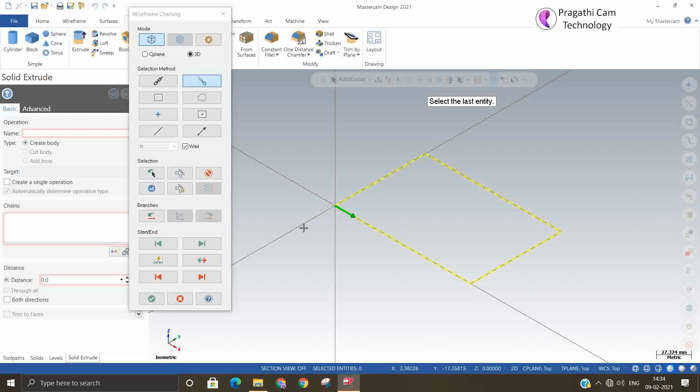I'll make one small solid model. I'll make one rectangle, 150 by 100. Okay, I'll say solid extrude. So make it. Okay.

So we'll add some holes here now. Go to solid holes. Nothing is there to pick from the points, so first I'll make some points so that I can place the holes in the right place. Okay, so I made some points.

Now solid holes, I'll pick that point. One, two, three. So all three are simple holes. You can change the type of hole and other things.

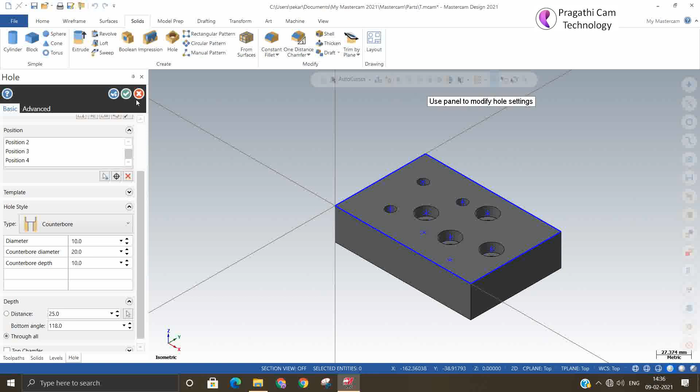Even if you want a stepped hole, meaning an Allen bolt hole, or a countersink type hole, or other type hole, whatever thing you want you can make it. These three holes will make a counterbore type hole. So these many holes are made now.

Now wireframe geometry is not required, so I just deleted it. Suppose you want to drill here, you need the center point and axis. For that application only, that hole axis option is necessary. But in 3 axis, this hole axis method is not much useful here. But still, I'll show you what the hole axis can do.

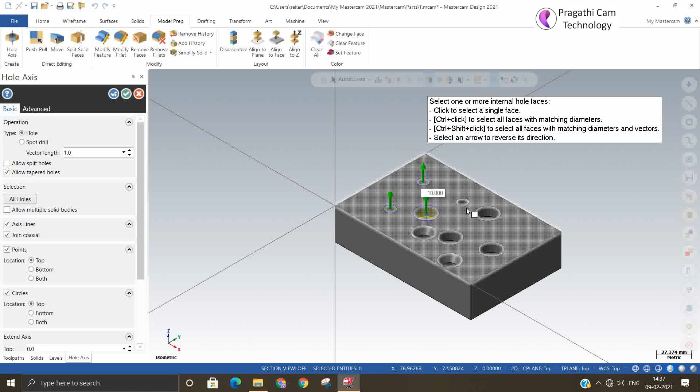Now I select the first hole, second hole, third hole, fourth hole, fifth hole. So two things you are getting together: one is the center point, and another is the tool axis. Together you are getting both. So while drilling, you will get the tool axis point and also the axis, both you will get it. So it makes it too easy to make the drilling.

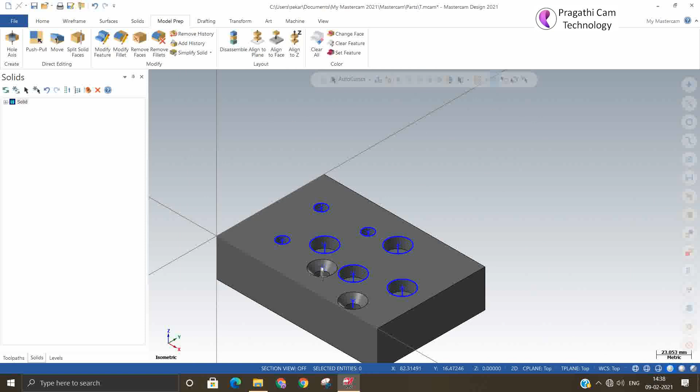Actually, this particular feature is not meant for this. Maybe a hole in the inclined plane you cannot otherwise do - in that situation it is useful.

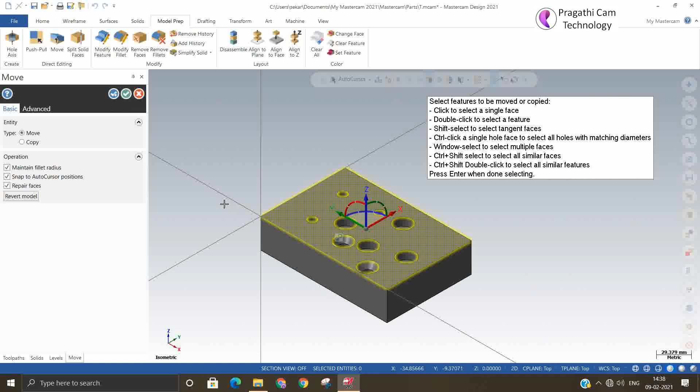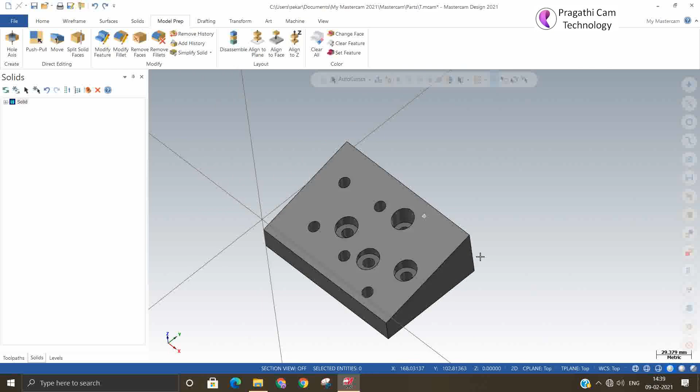So next option we will take the move option. I made it an inclined plane, but this, my hole, is still okay. I just made an inclined plane now. So now you need to drill the holes on that. So now definitely you need a hole axis, otherwise it's very difficult for you to catch the center point. So in that situation you can select the hole axis.

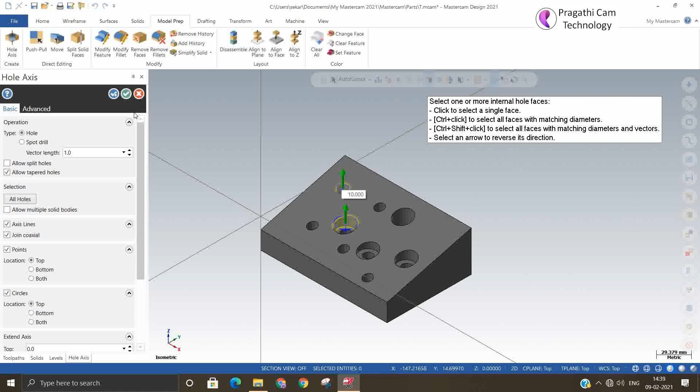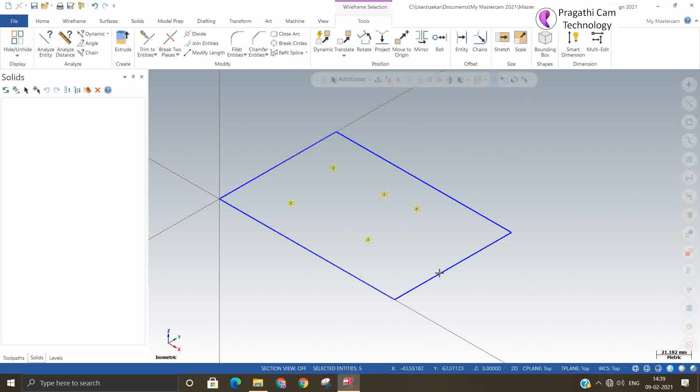Okay, now we can see this. The exact requirement is something else. Here also you can do very nicely, so I'll do one thing. I'll delete this and I'll go for... it's a very simple method of making the hole axis. But I want to show you the exact place where this hole axis will be used in a better way. So now I made everything in front.

I'll draw something here. I'll make one rectangle here. And I'll make some inclined plane here, and I trim this.

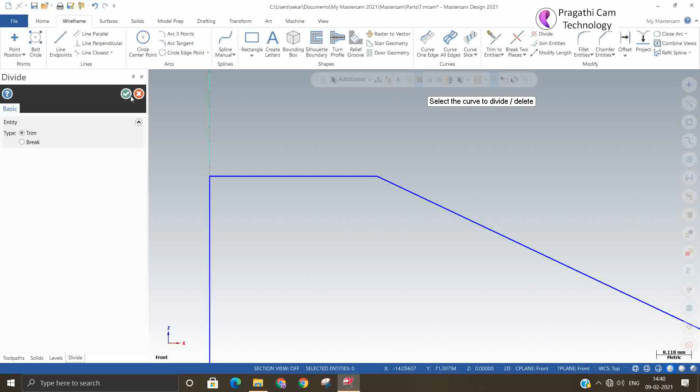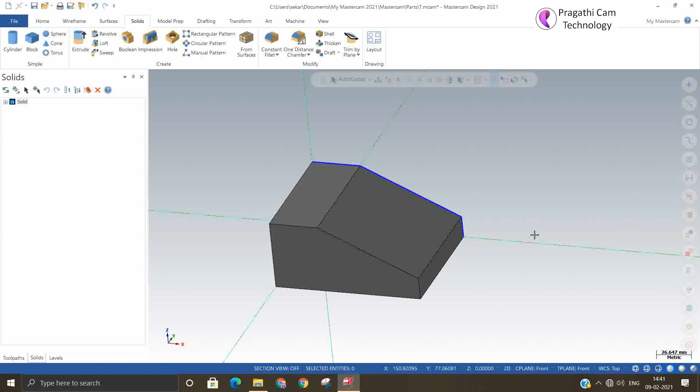So now I'll make one extrude solid. For distance I'll make it 100. So now suppose I want to make it on that inclined plane, so you need to make an inclined plane. So I'll say, now I'll explain to you, I want one plane now, an inclined plane.

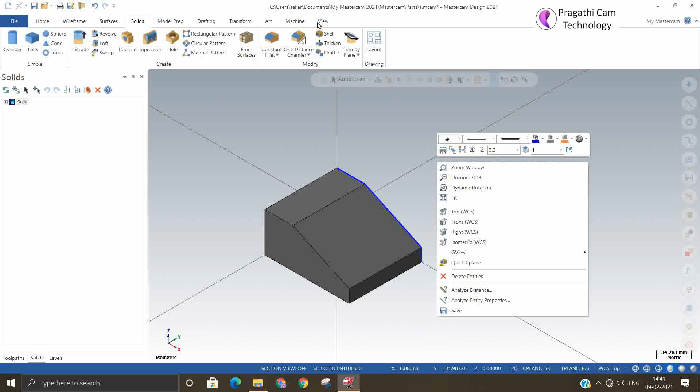Here I need the inclined plane, so go to view plane manager, create a plane by solid face. I just click on that inclined plane and the plane is ready now. You can give a name for this. This origin, if you want, you can modify it. I'll say this is INC plane, inclined plane.

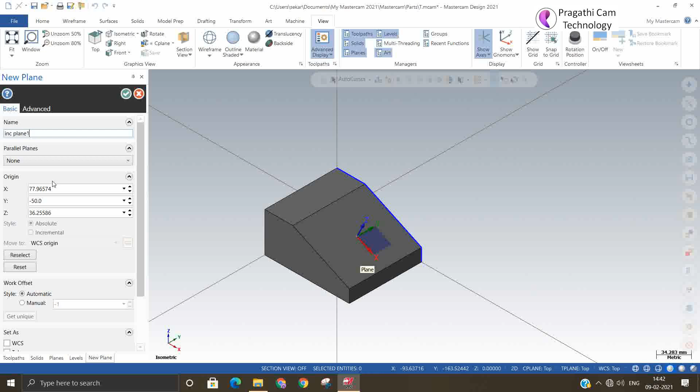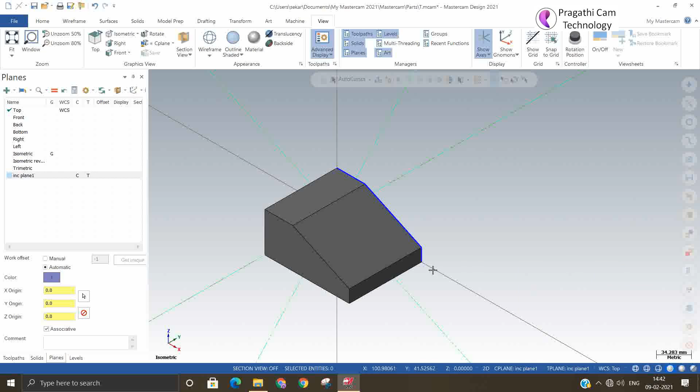If you want, you can reselect the origin. I kept the origin on the other end. So now I'll make the C plane - make my C plane the INC plane. So now you can say your plane is rotated. If you want to see your XYZ, just click on the gnomons, so your X, Y and Z are shown to you on the inclined plane.

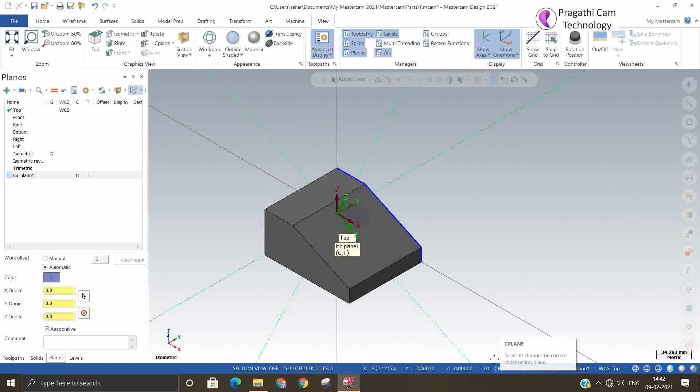You can keep it there also, but that origin should be in an accessible place. That's the reason. So I'll go to wireframe circle. I'll make some lines here so that to make the... here also I'll go to the plane and say plane. I'll make some lines here. This line is my Z plane - I have not shifted my Z. I'll shift it to that edge.

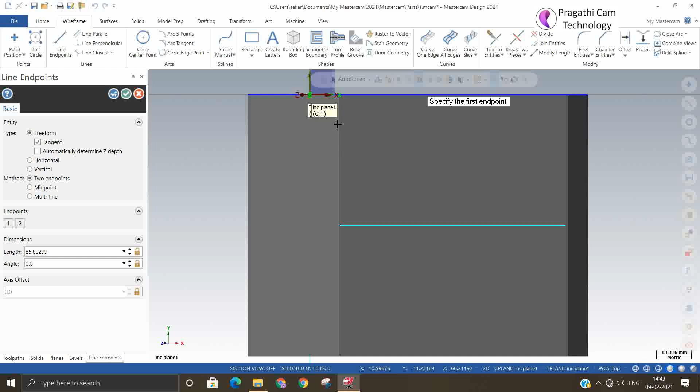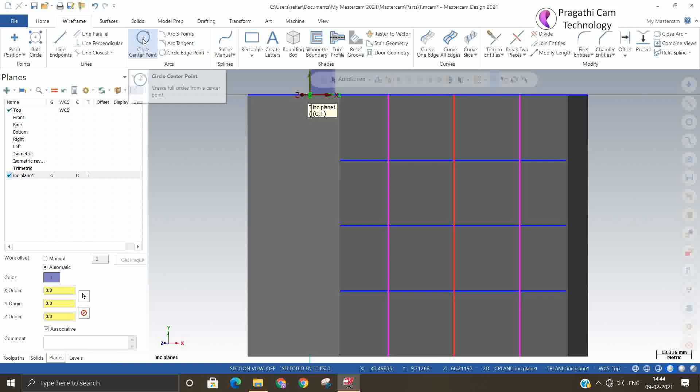Okay, so now I shifted my Z. Now I'll draw some line here, approximately, or otherwise you can offset it also, in both directions. And from here also you can draw some line - that also you can offset it. Now you got the nine center points, so now you can go for drawing a circle. You can lock it and put all six holes here - no, nine holes. Okay.

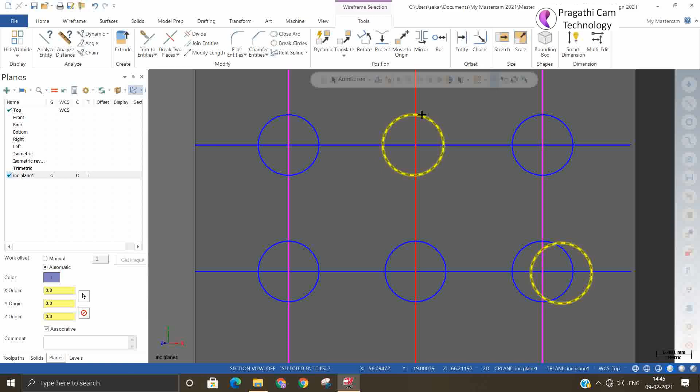I just corrected some of the line circles that were not exactly on my required point, so I just deleted those points, those circles.

Okay, now holes I made it. Now solid extrude all six holes. I will select, accept.

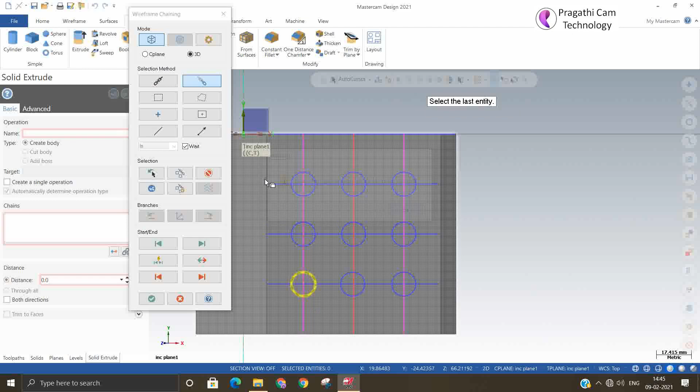So now what we are doing is in the inclined plane, so now the hole also looks inclined. So direction not wrong, I just modified the direction. Clicking on the profile, automatically the direction of the hole will change.

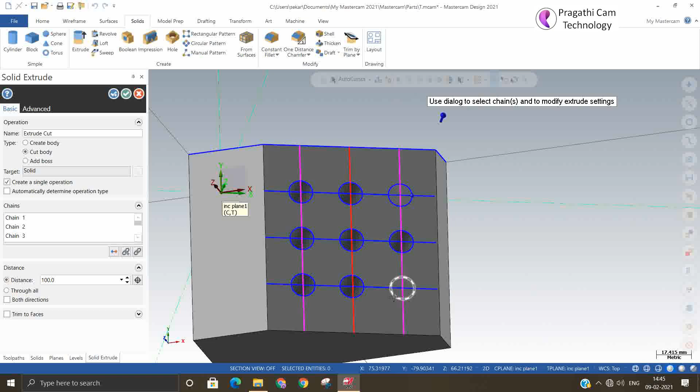So now you can delete all the wireframe. So now the situation is like this. You can say isometric, now I made it as. Now the situation is like this.

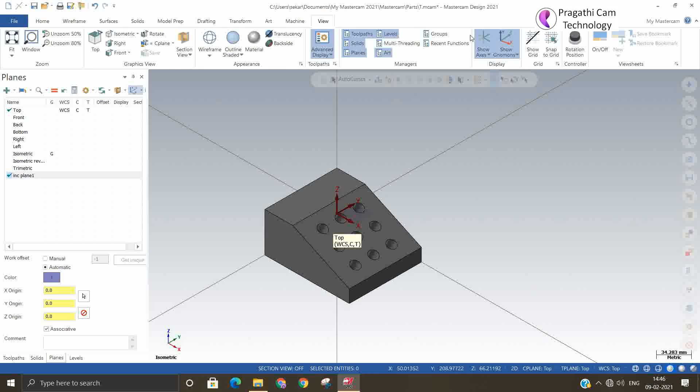So you can make it like this. The model has come here, but holes are inclined holes. So if you want in front view, just remove the shading. So you can see that the holes are inclined.

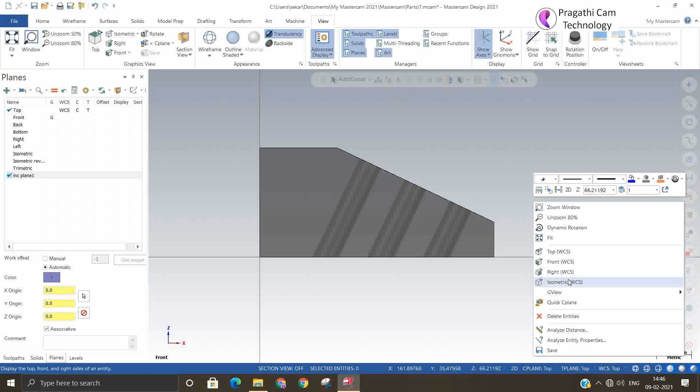So for that reason only, this hole axis has been made. For this, if you want, you need the inclined line and the center point. So for machining this, there are two options.

You can make one fixture, make it parallel to the table, and drill it. Otherwise, you should have the machining head, your milling machine capable of tilting, meaning it's a fourth axis. Maybe if you have a multi-axis machine, then automatically you can do this kind of work.

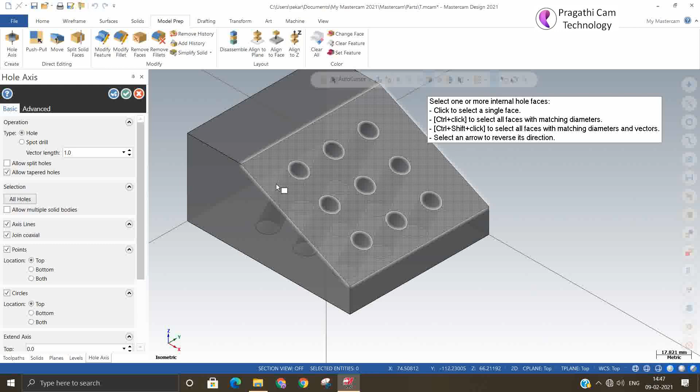So for that reason only, this hole axis has been made. Now you can see, you can select it. All the things, if you select, you will see the hole axis and the center point you will get.

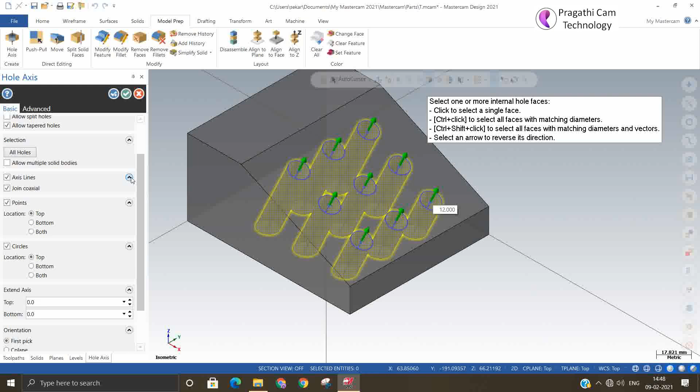You can change the line length with height and other things you can modify. You can see that in the window all the things you can change it. I said okay, now.

Just I will remove the transparency. Now we can see that one point is there and one line is there. So you can easily define your hole axis.

So in the old version, in the 5-axis, inclined plane, if you want to drill an inclined drill, it is very difficult to get the center of this hole, and also making the line on the center of this inclined hole is also very difficult in the older version. So that huge difficulty was eliminated by this inclined plane hole axis.

Okay, I saved that file just. It's clear now, hole axis. So next we will see.

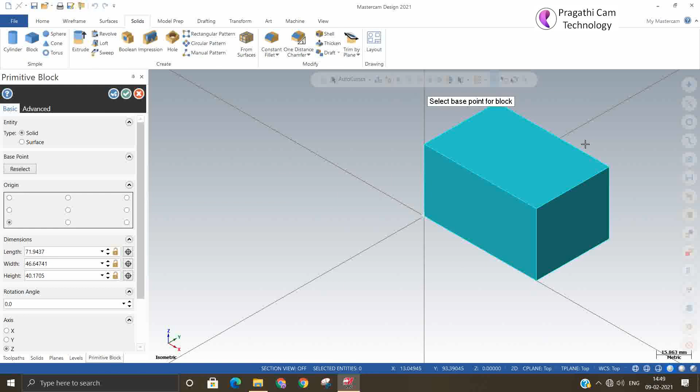We need some solid model. So the model preparation means addition to the solid model, meaning addition and subtraction if you want to do it.

In the solid model, that will be done in the model preparation. So because of this model, there is an option called push pull. You can, if you want to increase or decrease the size, you can increase the length. So this option will allow you to easily edit the model very easily.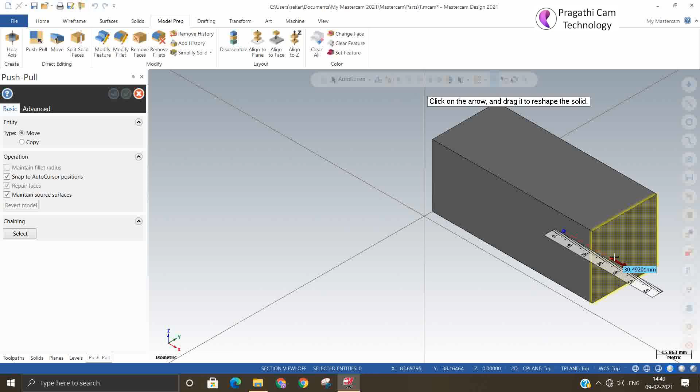Okay, you can input the amount of model lengthening or decreasing, that is also you can do by pushing and pulling, however you want, in whichever direction you want. You can just push pull, and however much you type, it will extend the model like that.

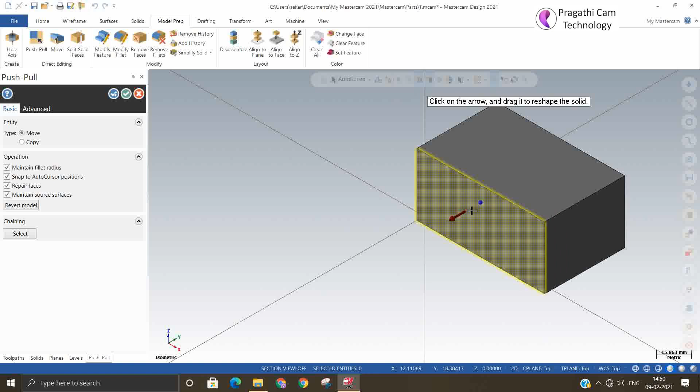So it must be a solid model, that is the basic criteria. Next option is the move option.

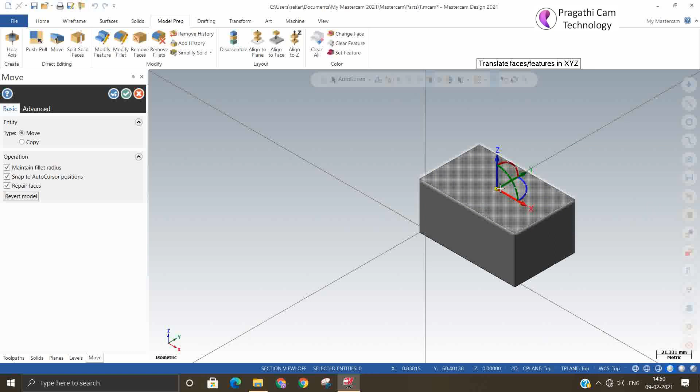We can, if you want to rotate one face, we can rotate it. I brought it in, kept in the edge now. Okay, now I'll rotate about the x-axis. One clock shape will display. Just hold the gnomon and rotate and give the angle.

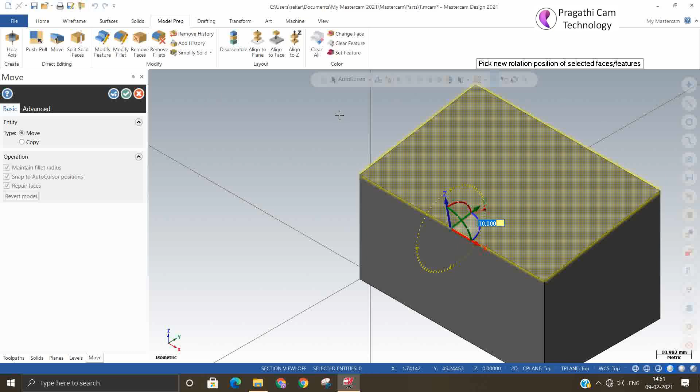See, whatever direction you want to rotate, you can rotate about any axis, you are free to. Now I just rotated about the x-axis. So if you want it rotated about the y-axis, yes you can, you can.

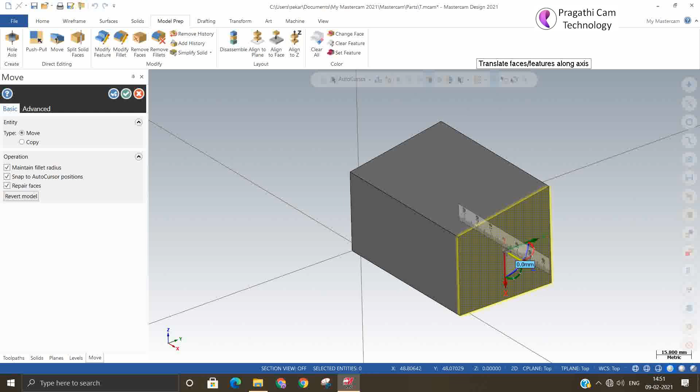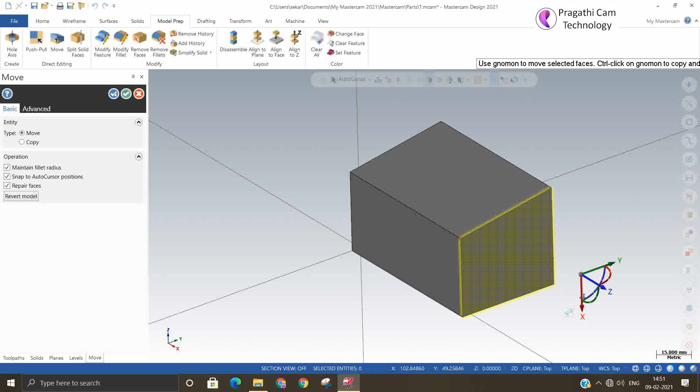Okay, I'll keep it here, on this edge. You can see move, and keeping on the edge, so whichever angle you want to rotate, you can rotate. See, so about that edge you are rotating.

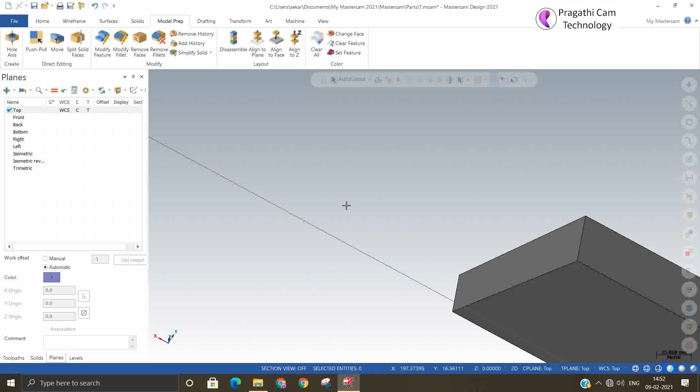Many times it will be useful for modifying the model which you have got. Okay, this is about the move.

Next is the split faces. So actually we are not splitting the solid, just the face we are making a small split, where you want some intersection, but it is not disturbing the solid. Solid is one only, but in the solid it is making some split in the faces.

So while selecting or making something, you can pick that point on that split.

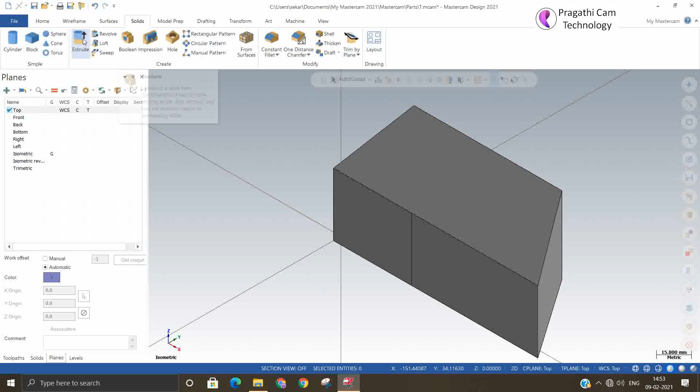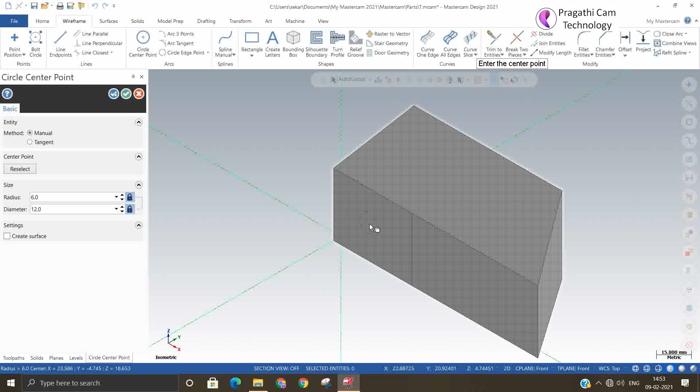Suppose if you want to drill on that split point, or some wireframe if you want to do, C plane you can say front. Z, I think I need to keep it. Okay, now you can see.

I just want whether y direction split or x direction split, but we are not disturbing the solid. Only on the face you are creating one split, that's all.

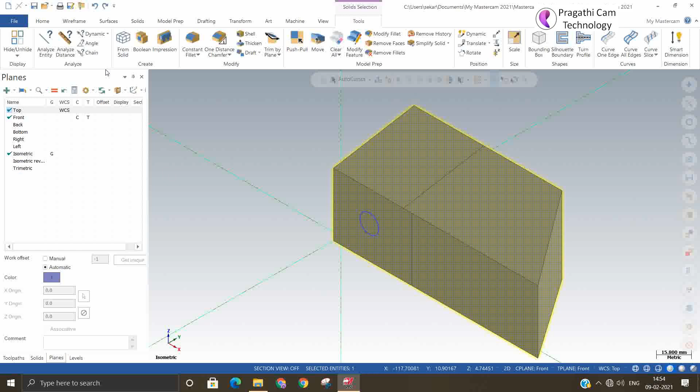Next is the modify feature option available. So it depends upon how you are utilizing the facility.

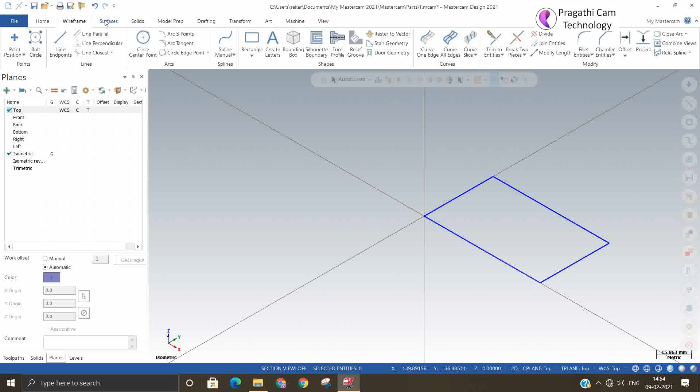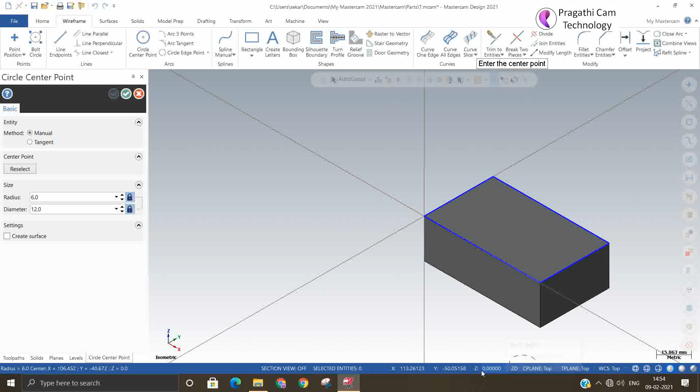I'll say solid extrude. Now I'll add some feature here. Okay, and I'll say solid extrude, add boss. So now if you see in the solid property, it shows a single solid.

So in earlier versions there were history issues, but in 2021 there is no issue in the solid preparation modify feature.

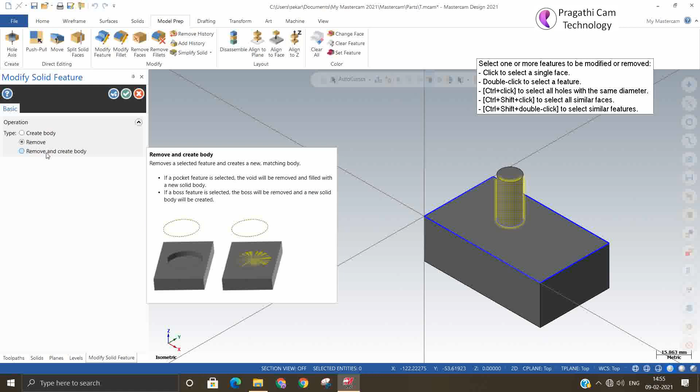So you can select a new feature, you can make it a new body, or you can remove this body, you can remove it or add it.

So now I made it a new body. So this is one, this is a full body, this is the only body. So it is additionally copied, it made one small copy.

So if you want, you can move this and translate it. Okay, and selection.

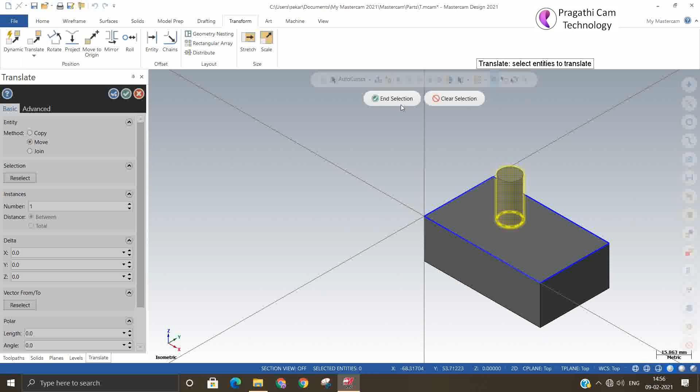Only wireframe has come. It is separated, but it is not dismantled from the original model. Okay.

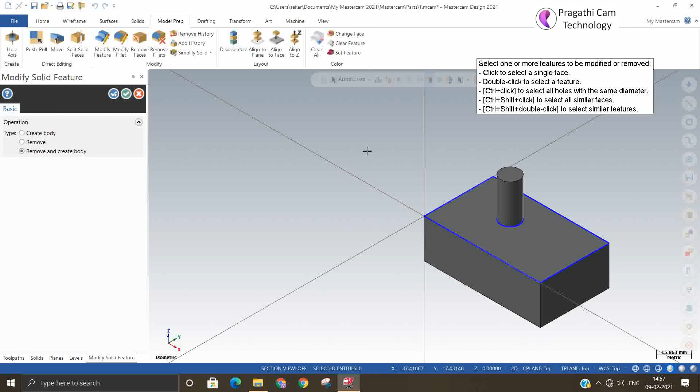Modify feature, remove feature - you can remove it. It shows that if you remove it, it gives an error modification. So it removed totally. If you want to add something, you can add it, or you can remove whatever the thing is there. That is the modify feature.

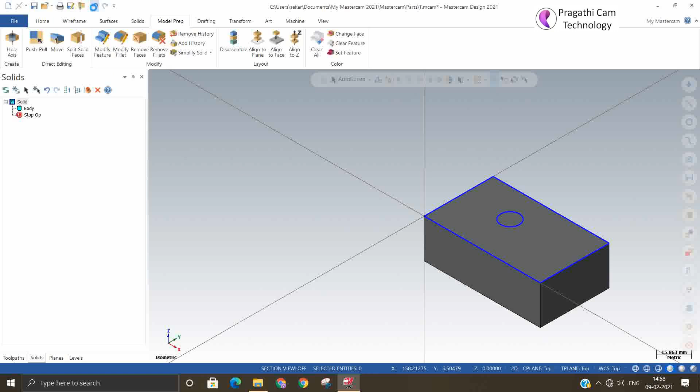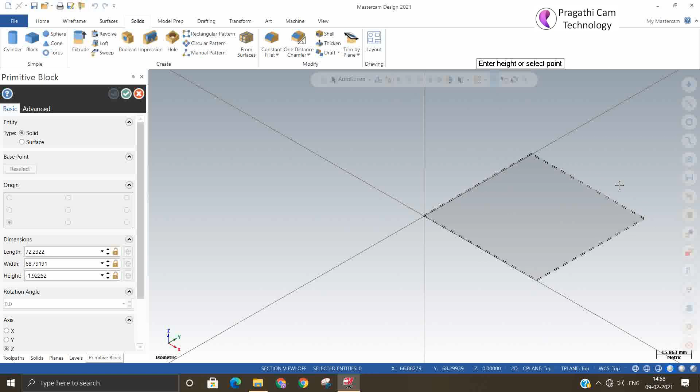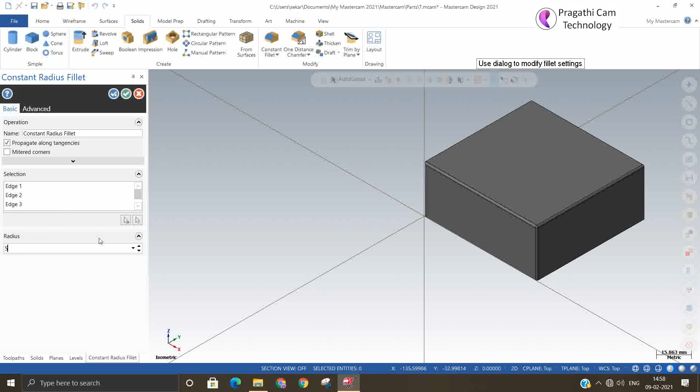Next is the modify fillet. So now I'll make one solid, and I'll add some fillets here. I just put it in the visible edge because it's easy for us to check it. So now we'll go to modify fillet.

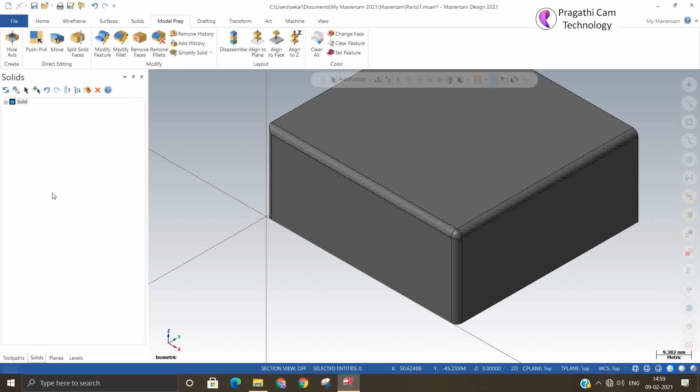You see one selection, it has selected the entire fillet and modified it. So this is the modify fillet. There is an option where you can remove all the fillets. Okay, either modify fillet or remove fillet.

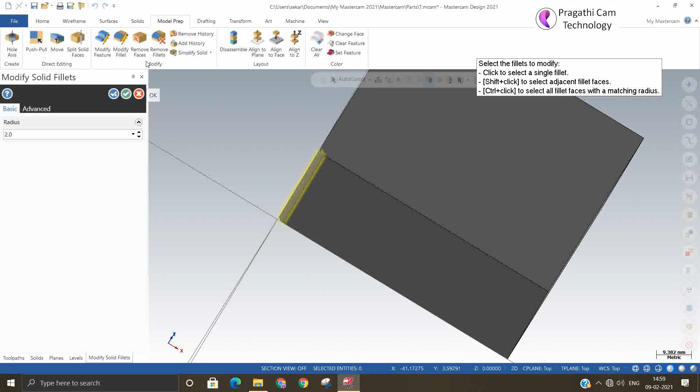And it will work for chamfer also, I don't know, we'll check it. It is deleted the faces. Okay, remove fillet. Okay.

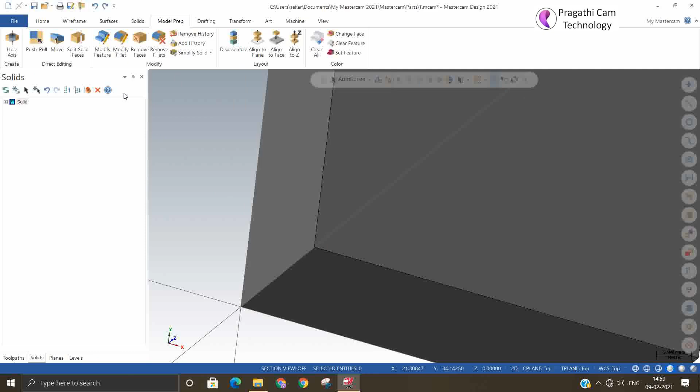You remove, delete one face means it makes the hollow sheet body. So this is a sheet body now. So you can add the thickness by solid. Thicken option is selected, then it becomes a thick shell. This is the remove faces.

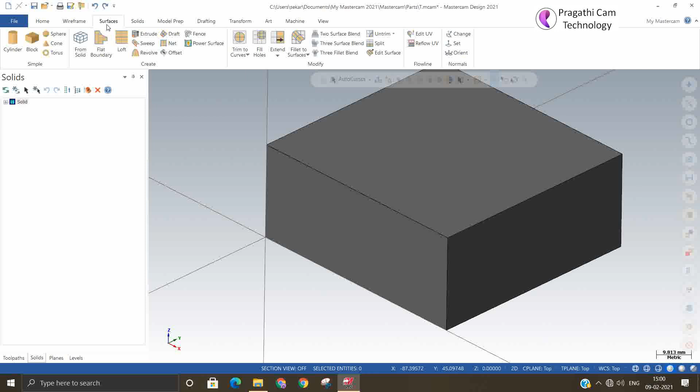So now we need to see when there is a chamfer, what is the effect - that we need to study now. Just I made the chamfer. Okay, now whether it allows me to modify the fillet, modify fillet will work here, I don't know. Let us check it.

No, it's not working here. Even remove fillet also, it's not working. Remove feature, modify feature - yes, it is accepting. So you can use modify feature to modify your chamfers.

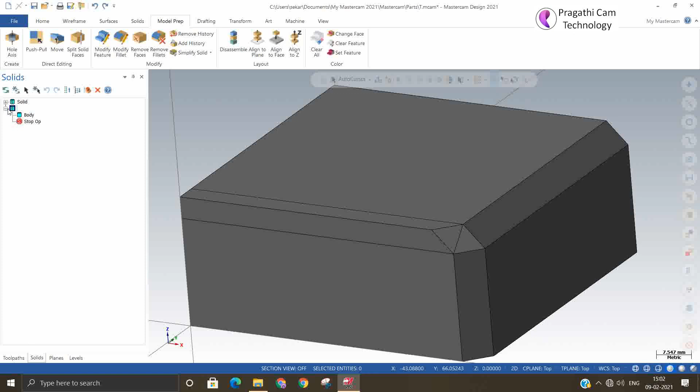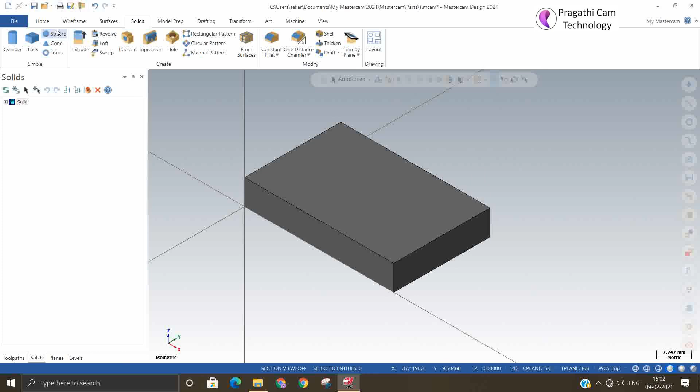So I deleted now. Now the next is the history. So there is no question of operation history in 2021, but in the old version there's history removal and other things were there.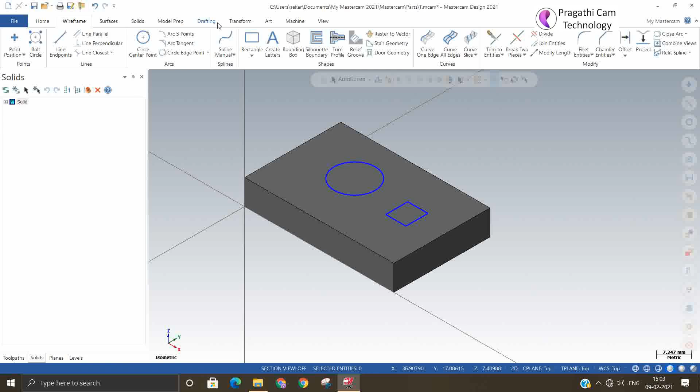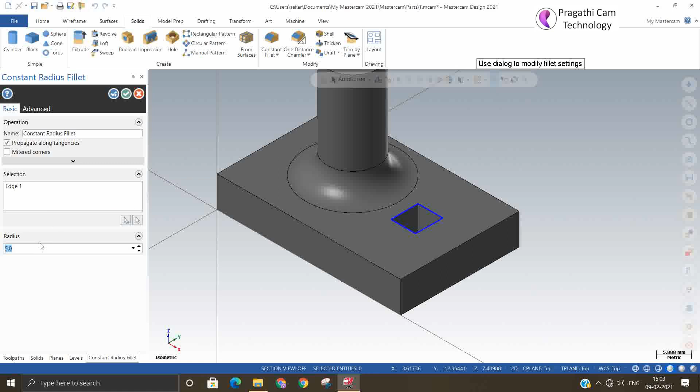So now we'll add this solid extrude. So now I made one small example. I just added one fillet here, and all these edges. But I have made this many operations, but it shows only body. In the old version, if you say it is extruded, it is added boss, it is filleted like this, it will show the history.

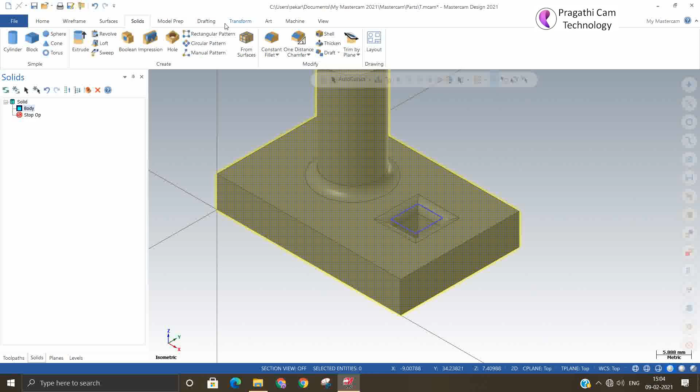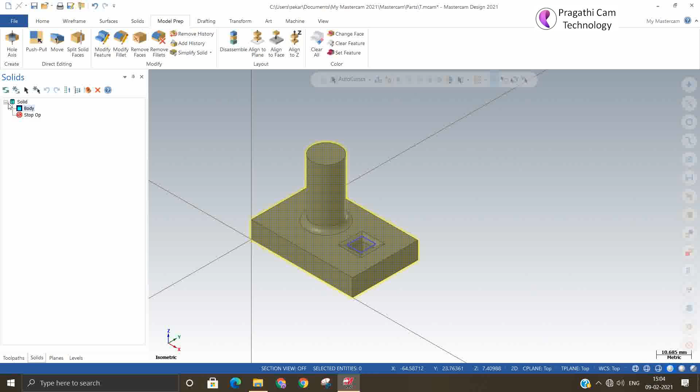Now in model preparation, there is an option called add history. You select, then click there. So now you can see that the history is added. So if you don't want history, remove history. So like this history you can make it or remove it also.

A simplify solid option also given. Not much important - there are simple things there, not much importance, and you can explore it, no problem. Okay, so what are all the main things I explained? Okay.

Assemble and disassemble option is there. We can just see the - in Mastercam we are not going to do a huge assembly here, but if you receive an assembly file, yes, you can explore it and you can do this. All the things you can do by transform itself.

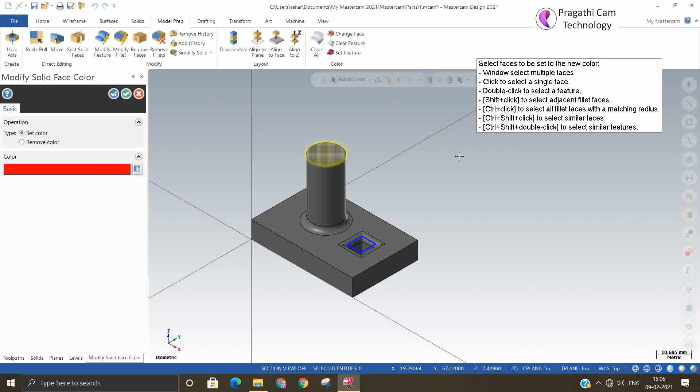Change face color - that you can do it here. Suppose any one face you want some other color, you can select and apply, just changing the color. So you can set one particular color for all the faces, that also you can do. Change face color, some other color you can keep it.

So you can clear all, then it will remove all colors. This is about adding and removing colors on the solid faces. So this is all about the color features, all applicable to the existing solid and modification.

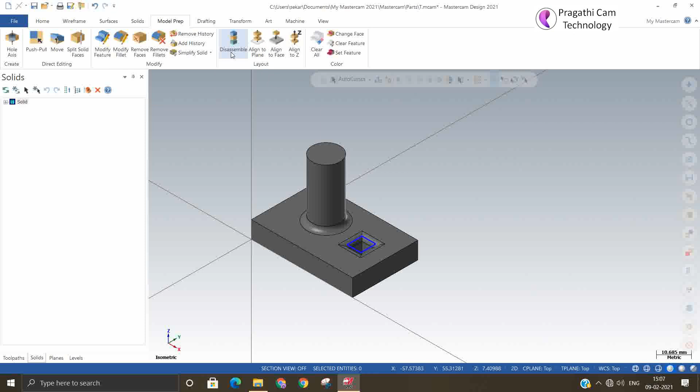Okay, so next is assembly and disassembly. We are not going very deep here, just for one sample we are going to see. So now you can see one small punch die assembly we have made earlier. The same thing we are going to use now. Disassemble.

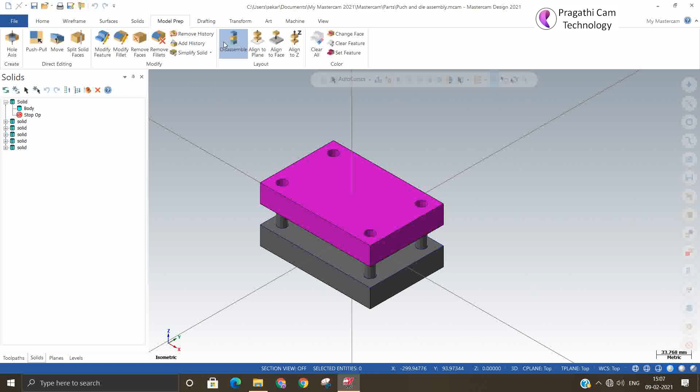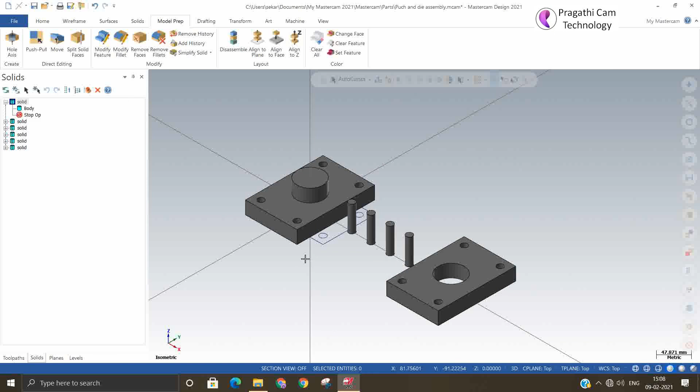So which direction you want? Select the entire model. So now you can see that it is disassembled, and which direction you have to say, in that direction it will disassemble. Suppose if you brought a big assembly file and you want to separate the models, that time you can use it. So align and other things you can do.

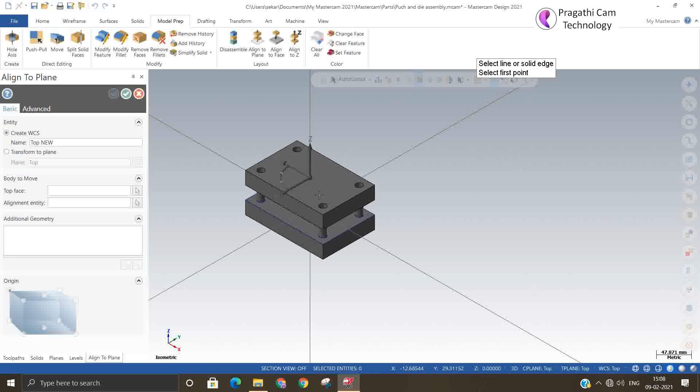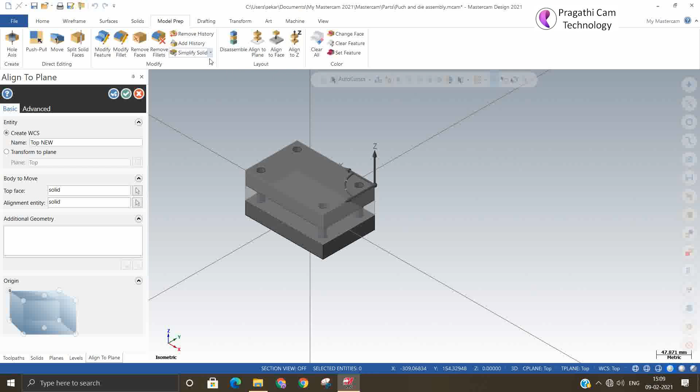You can align to plane. So this face you can make your own plane by changing it. So I just reverse my XYZ, so it becomes a new plane. So what is the existing plane? I just rotated it to 180 degrees. So like this you can align some planes and make a new plane. So you can align faces.

So it is all used in the disassembly application only. We have seen that whatever things are available in the modeling, all the things we have tested and checked, we have done it. This is the last one, solid model preparation, and we have finished everything. And next we are going to move into the machining.

So we are going to start milling now. Okay, thank you.